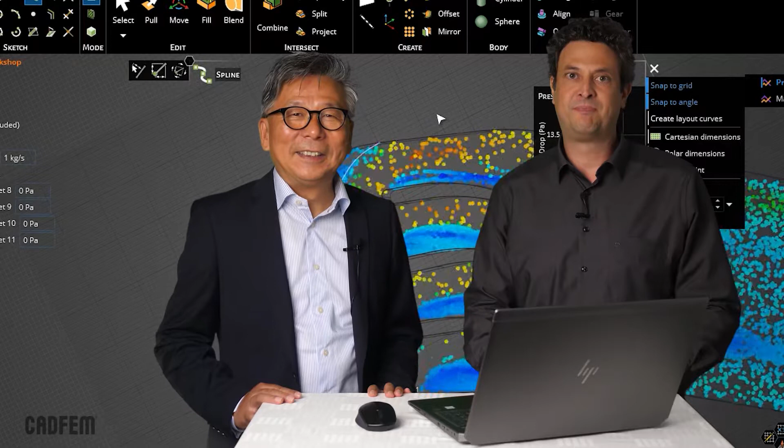What does an engineer need if he wants to realize his great ideas in a product? Of course he needs a tool with which he can change his geometry very quickly. If he has a lot of ideas, he would of course also like to be able to evaluate very quickly whether they are good or not. Then, when the best idea has won, he would certainly like to validate how accurate the result is. So, the three important terms are easy modeling, quick evaluation and accurate validation. We will also see this in the next examples.

Here we see a great product developed by a good engineer. Now he would like to know what the stress distribution under inner pressure looks like, and instead of waiting many hours, he can use the new technology to analyze the stress distribution immediately. So now the engineer sees that the notch stress is not correct, because there is no rounding at all, so he needs a tool with which he can change the geometry very quickly. With this tool he can immediately insert a new radius in the geometry.

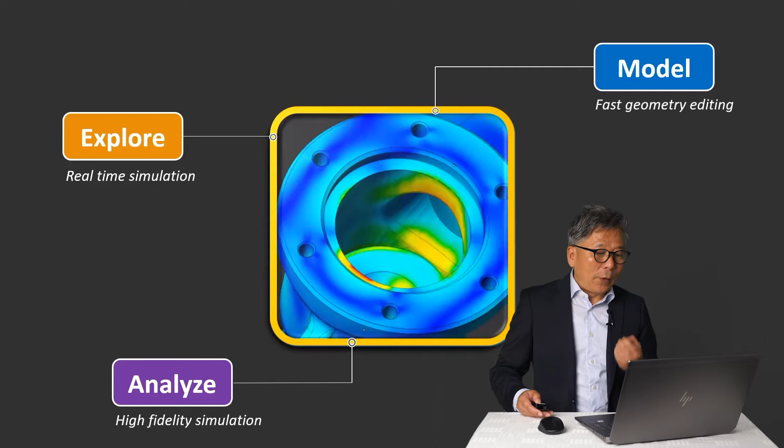And at the same time he can immediately simulate the stress distribution again thanks to the new simulation possibilities. So, he can test and validate different variants. Then he decides on a very specific good variant, and now he wants to know exactly how accurate the result is. In other words, at that moment he needs a tool that allows him to simulate and validate the result with very good accuracy. For this purpose, the Ansys Mechanical solver is used here, and a simulation is performed with it.

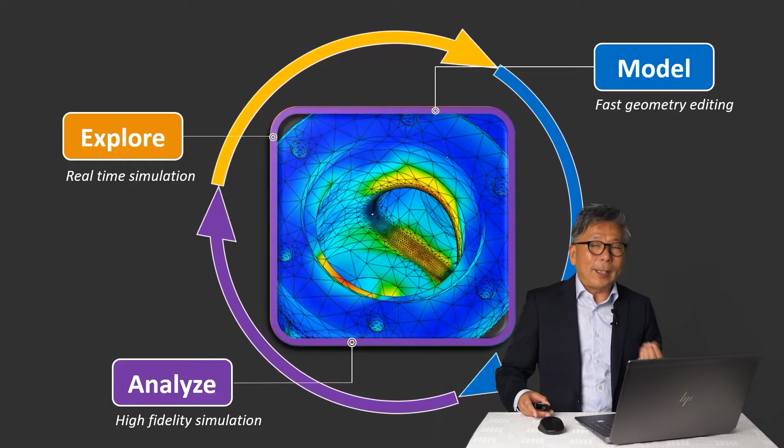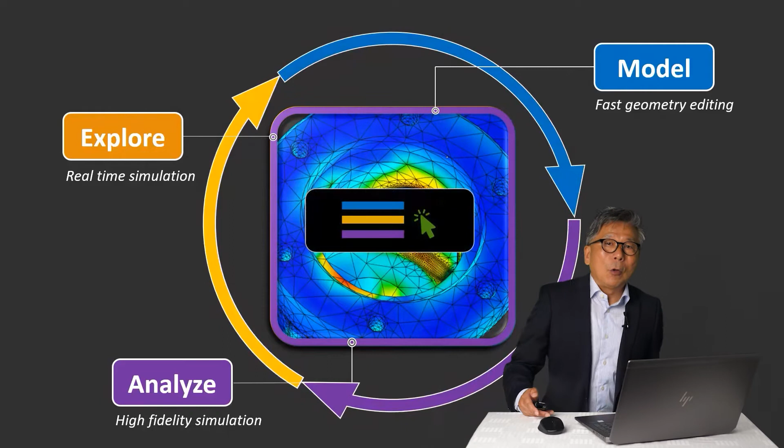In the early phase of development he will not yet know exactly when he wants to model geometry, when he wants to validate and when he simply wants to evaluate the idea. This is a dynamic process. Therefore, he can decide at any time what he wants to do, because it is not the software that decides, but the smart engineer. The engineer can say when he wants to model, validate or evaluate. The software does exactly what the engineer needs.

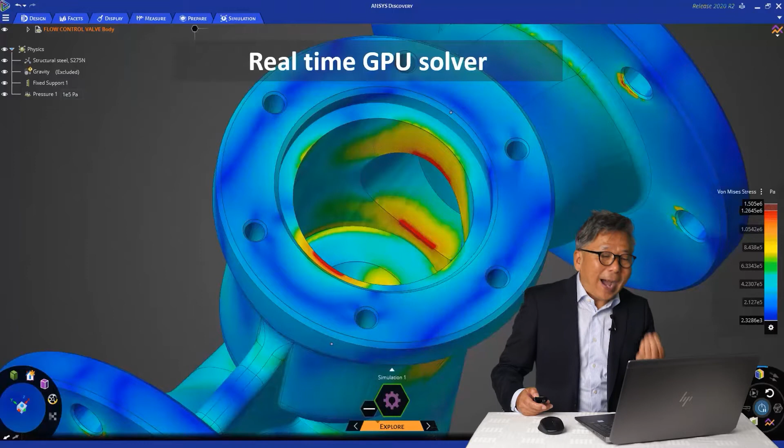In the geometry state the engineer can say, okay, now I'm satisfied, now I want to see the stress distribution under inner pressure. And now he can see the stress distribution. Thanks to GPU technology, he gets a result within a few seconds. And because the result is available so quickly, it is possible to test different variants very quickly.

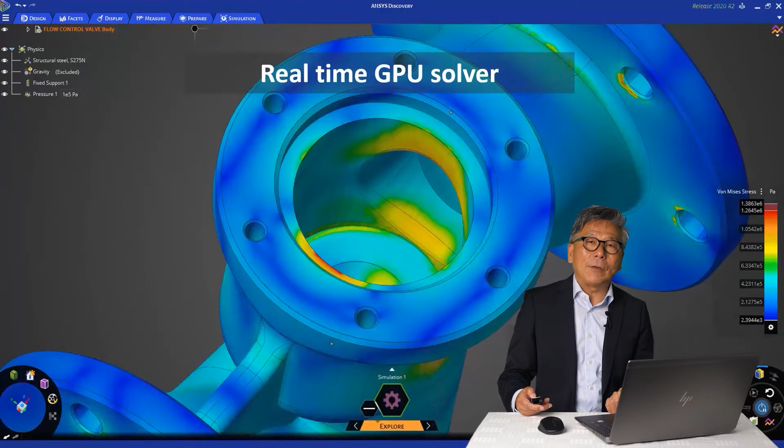For example, the notch stress - there you simply insert a radius. In the moment in which this radius is inserted, the result is already there. So, the engineer can quickly test different variants. Then he decides on a good variant, and now he wants to know exactly the stress in this region. For this purpose, a calculation is performed in the background with the Ansys Mechanical solver.

Now you might think that the software can do all this very well, but it is very difficult to operate. No, it does not have to be. With this new software technology, a very complicated task can still be solved very easily.

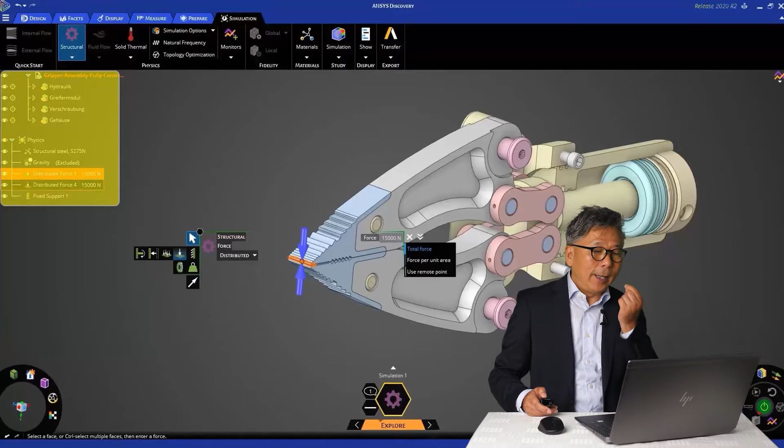This is the entire user interface of Ansys Discovery. Above you see a modern menu for those who are used to such a menu - you can work with it. For those who work in a very structured way, a tree is available on the left side. But very special and new is the heads-up display. This knows what the user wants to do.

That is why it communicates with the user. Here, for example, we have a structural mechanical task. When you click on a surface, the software asks what load you want to apply. The engineer says, a force. And the software asks, on a point or on a surface. This is how software-human communication starts.

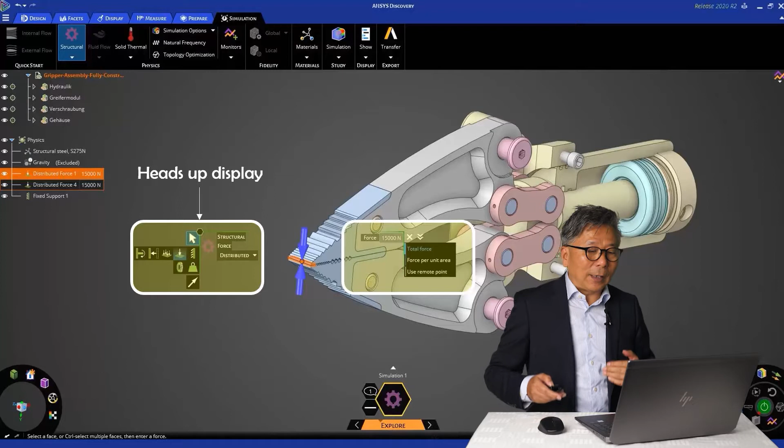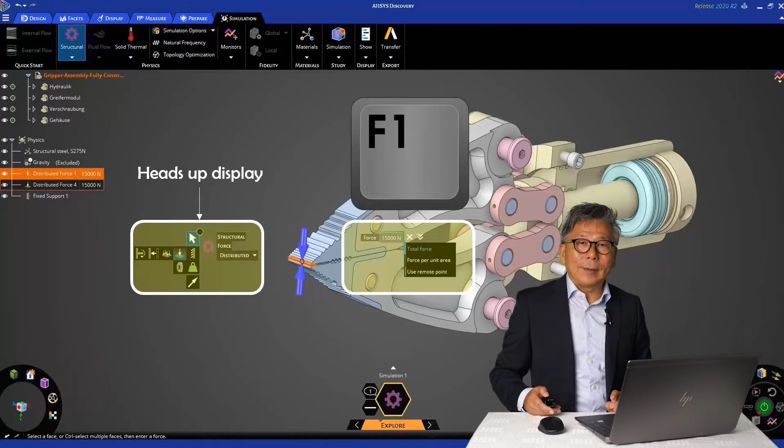At some point it may happen that you don't know what the next step is. But that is not a problem. Just press F1. At this moment the software shows you what is possible in this state. So don't worry, whenever you don't know what to do, you simply press F1.

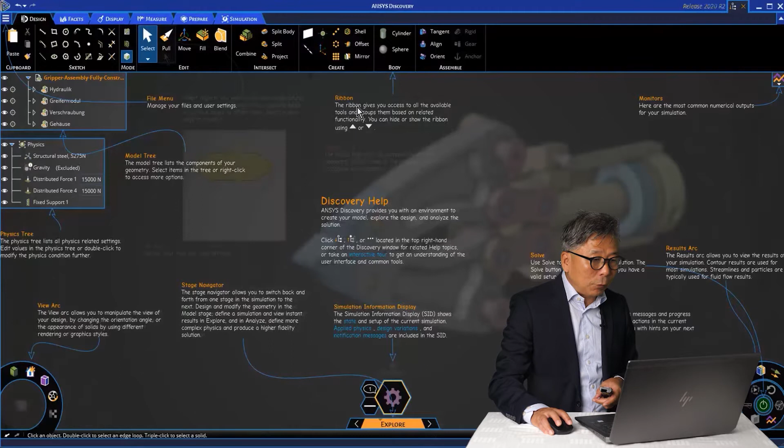This is more than just a help function. You get a complete overview of how the software works. For example, I would like to know this pull function. What the help shows is not only an explanation but also an animation of how this function works. If I want to make several drillings, I click on it and the software shows me how it works. This is a very modern and dynamic help system.

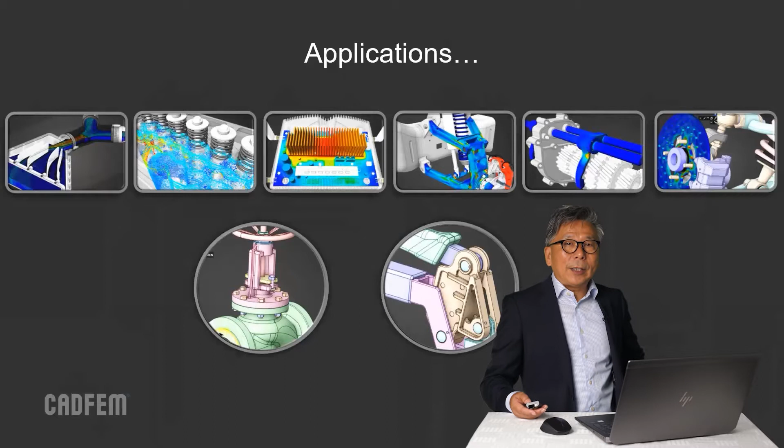We have tested very many applications with different physics, and in this presentation I would like to show you two examples. The first example is a fluid example. Here we see the geometry state. To simulate a flow, I simply extend the pipe. In this configuration I can do a fluid simulation in seconds. So I can examine different variants.

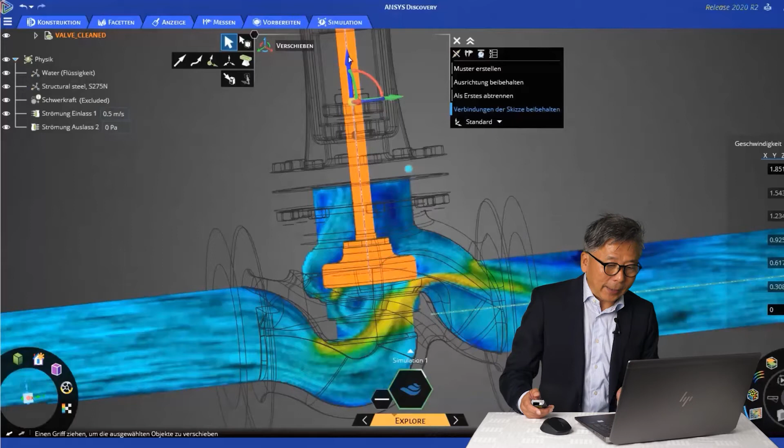Now I say, this is a good variant. I want to know the exact velocity distribution. For this I go into Analyze and create a very fine mesh. And then I can perform a very accurate fluid simulation with the Ansys Fluent Solver. Not only that, that's not the end of the story.

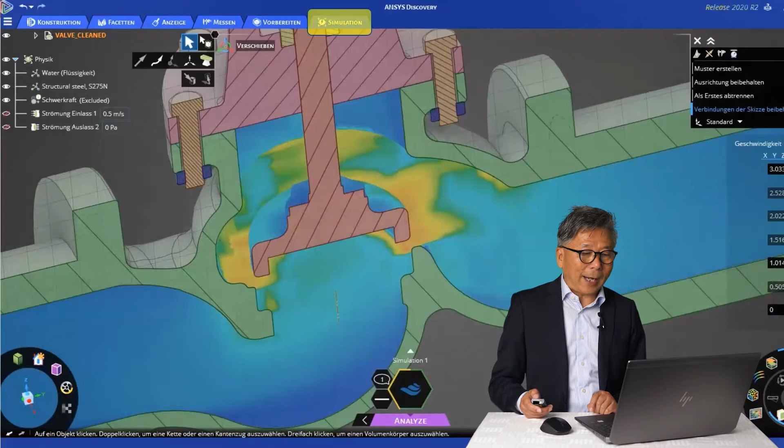The user can even go so far as to hand over the whole thing to an expert. There is an option to pass everything onto Ansys Fluent. Just click, and the model is exported to Fluent.

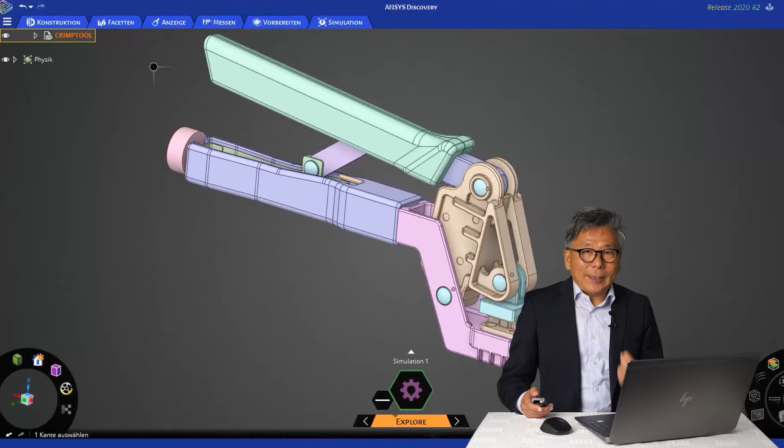The second example. Let me show you a structural mechanics example. This is the geometry, and we already know that it is very easy to modify. The simulation of different variants is very fast, so the engineer can quickly evaluate different variants.

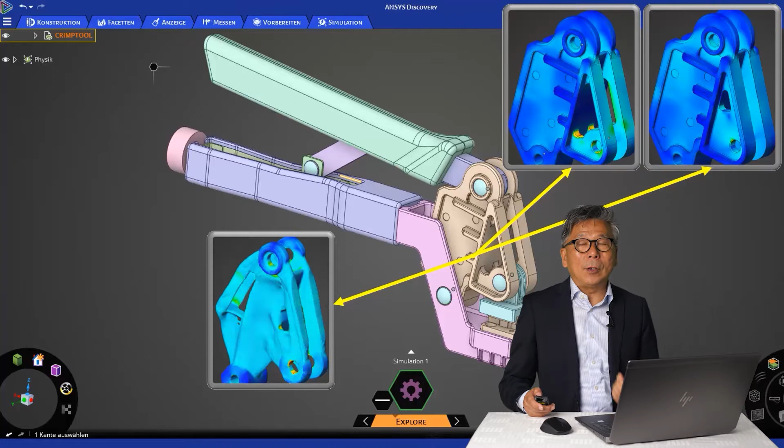Another possibility that the software offers is topology optimization. I can tell the software that I want to have a geometry optimized under a certain load. Now I get a geometry from the topology optimization. What's great is that I can convert the suggestion into a CAD model at the push of a button.

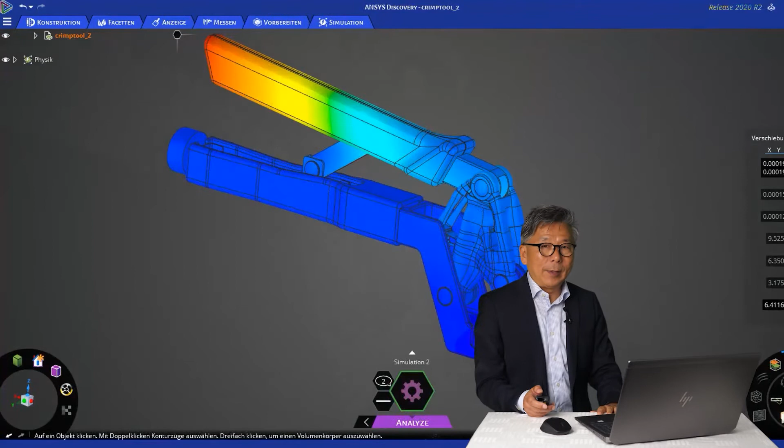Now I can replace the old geometry with this newly created geometry and perform a nonlinear contact simulation for the entire model in Ansys Discovery. Of course, I get a nonlinearly calculated result and a good local stress distribution.

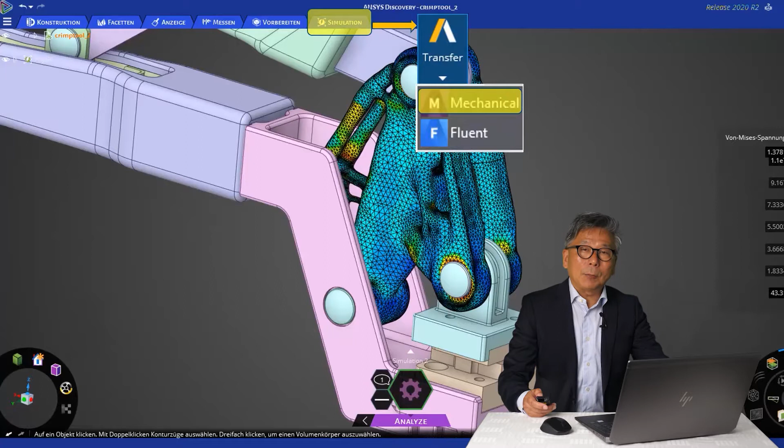Now comes the next question. So far everything is great, but I want to continue in Ansys Mechanical and do some other calculations. Is that possible? Yes, you can simply export the model to Ansys Mechanical here. What happens? You are now in Ansys Mechanical.

With an import like this, you always wonder what has really been imported. So here, from Discovery to Ansys Mechanical, the following has been imported: geometry, material, mesh, contacts, boundary conditions, and loads. The entire calculated model has been imported. Now you can continue with these imported things in Ansys Mechanical and calculate more things.

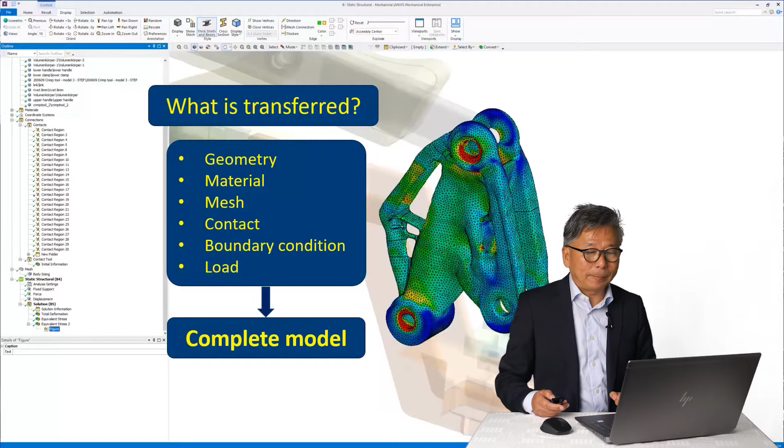Currently there are 4 physics in this release: structural mechanics, which includes linear and nonlinear statics and modal analysis; fluid analysis; thermal analysis; and thermal-mechanical coupled analysis.

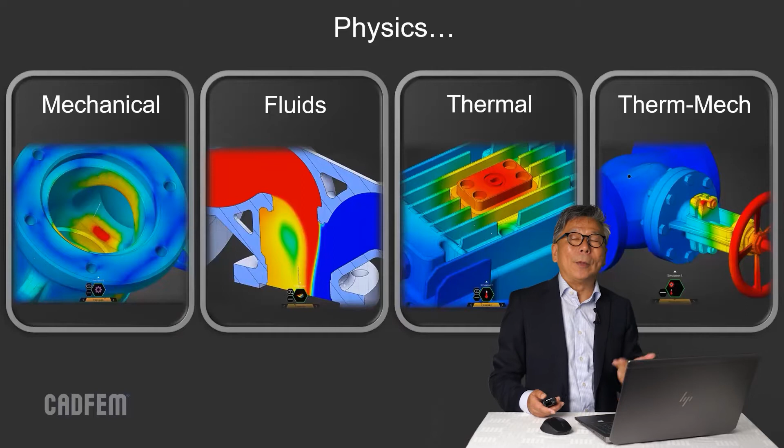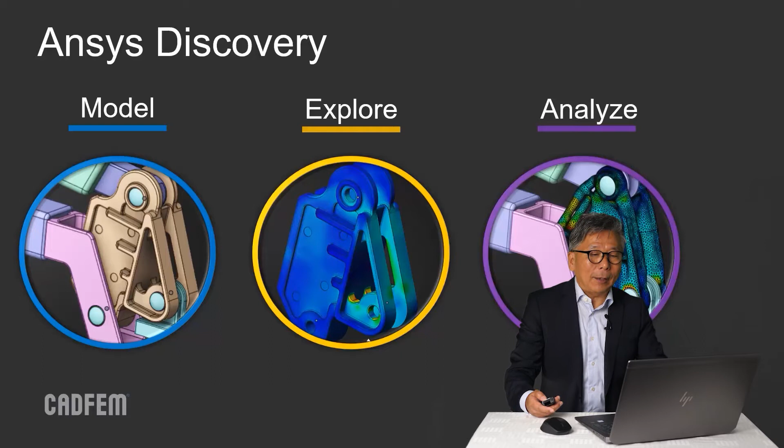Let me summarize. With Ansys Discovery we model, we simulate very quickly, and we validate very accurately. We don't have to decide on many software environments, we have everything in one environment. You will have a lot of fun with that. Thank you. And I would like to show you this joy with Model, Explore, Analyze.

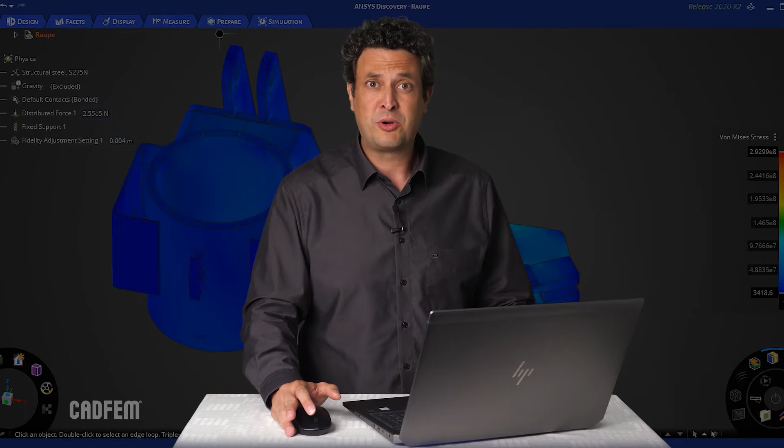Let's have a look at it in a demo. Within Discovery, I have chosen an example from the Engineering Office Brandt. The Engineering Office Brandt, Michael Brandt, has published a book, Understand Physics, Construct Better.

And there are many construction principles in it, and it always follows the thought that if I understand physics, or let myself be guided by physics, then I can also make better constructions. And this is exactly what the Explore function within Model, Explore, Analyze in Discovery makes possible. Hence this example.

And it is all about optimal stress distribution and bending, in other words, to optimally design the cross-sections. Let's have a look at this.

Within this assembly, we are not talking about the entire assembly. Instead, I will select the area that I want to simulate. I don't need the hydraulic cylinder either. Instead, I want to apply a force there.

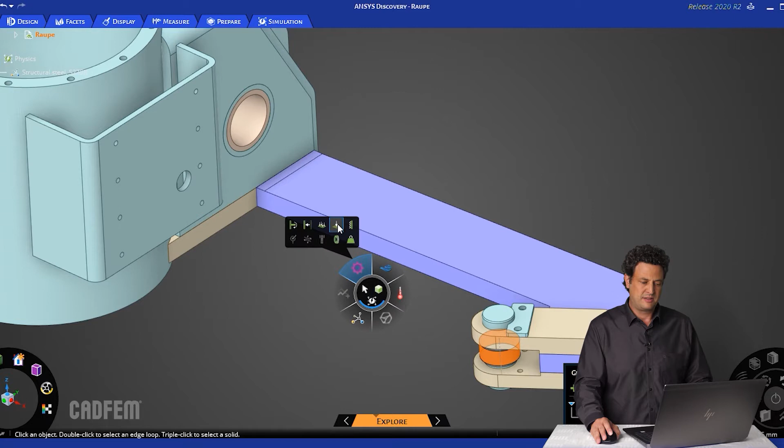I apply 255 kN. The direction is okay, after I have turned it around once. And then I still must fix it. So I take these support points here: 1, 2, 3 and 4, and apply a fixed support there.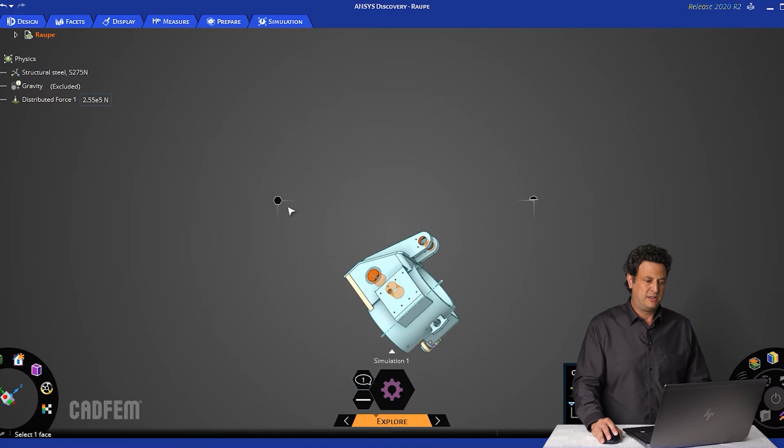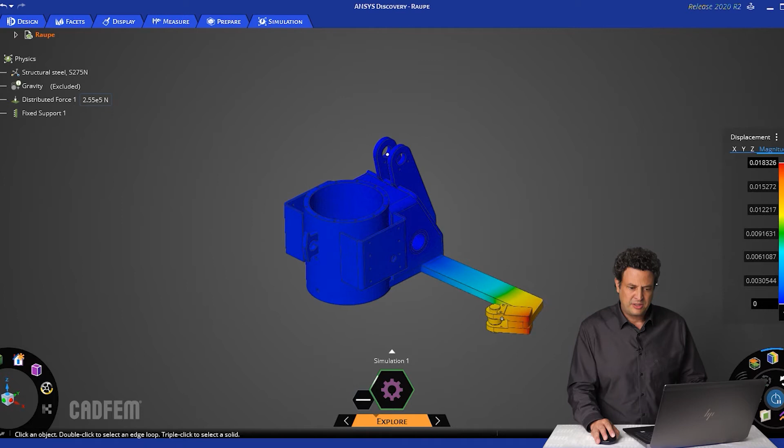Now I immediately start the analysis and look at the first result. I am interested in the deformations and in the stresses. First, the deformations for reasons of plausibility. The animation looks good. And second, the von Mises stress. And then you can already see that it is about this connector here. I must optimize it, and the first thing I could do is create a larger cross-section.

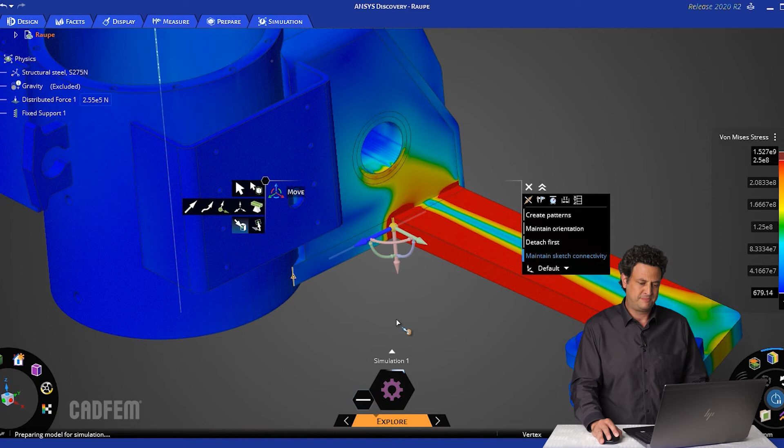I set the yield strength in the legend to 250 megapascals. And then I can take the edge here at the front and widen it properly so that we have more cross-section available for bending. Explore gives me immediate feedback. Okay, here I am already successful.

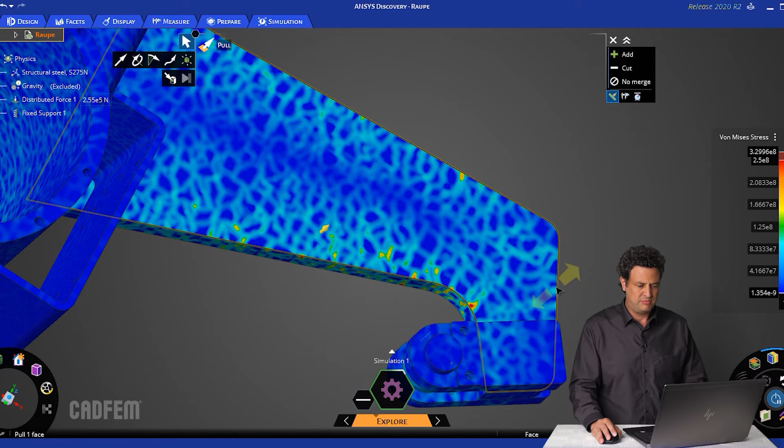I could follow the same thought back here. How do I provide more material here? For example, by entering a blend radius. And the result is quite satisfying, better than before. But there is more to it. I take this radius here and orient it concentrically with the cylinders here. This of course results in more material, and a larger cross-section. And what effect does it have on the stress?

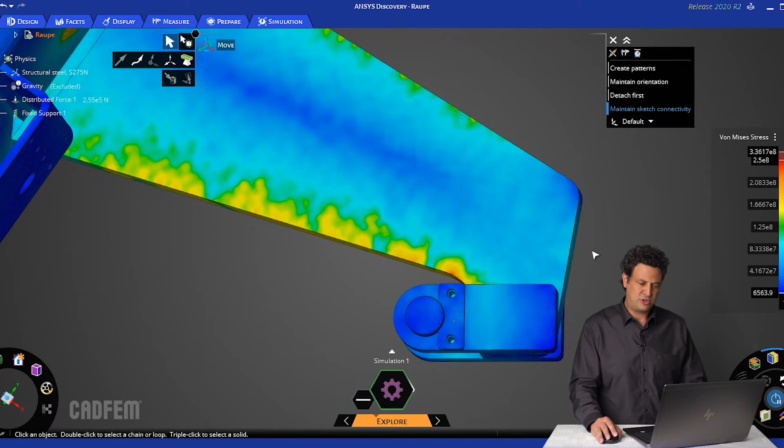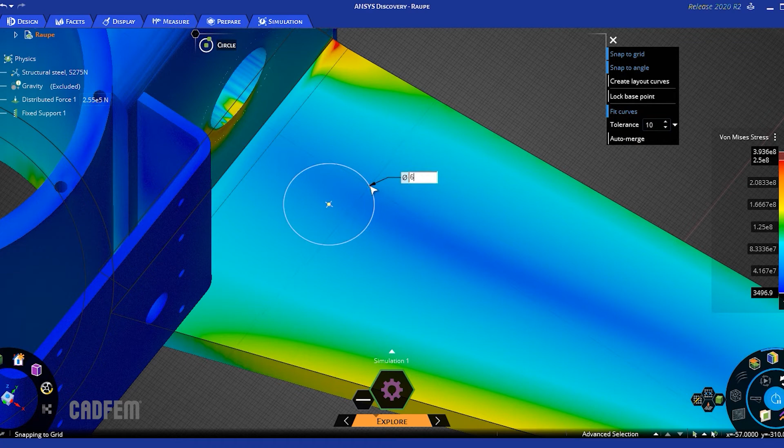Wonderful. So, 250 megapascals, we are probably very close to that here. Looks good. Here I have a neutral fiber, as you can see. And I could save a bit of material there now. Now I'll make a circle here, 60 mm, and the second smaller one 40 mm. And from that I can now create slotted holes.

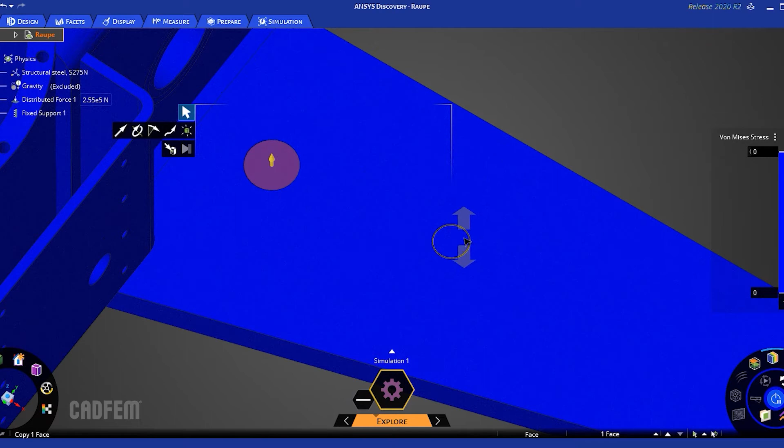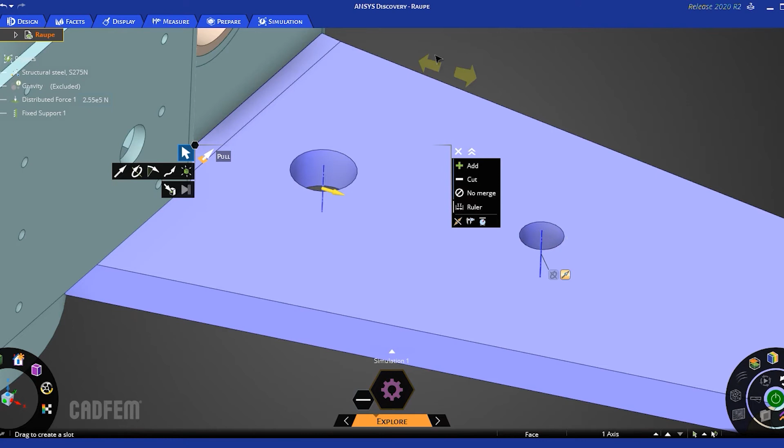I might switch off the solver for a moment so that it doesn't always calculate. And then we'll take this slotted hole here, or this hole. We take the axis. I want to draw it in this direction to a slotted hole, and then I make it 80 mm long. I do the same here in front. I take the axis, say that I would like to pull it in this direction, and make the whole thing 80 mm long again.

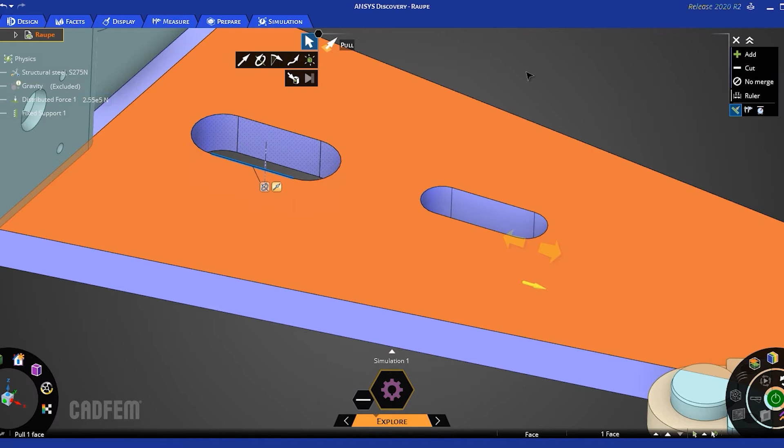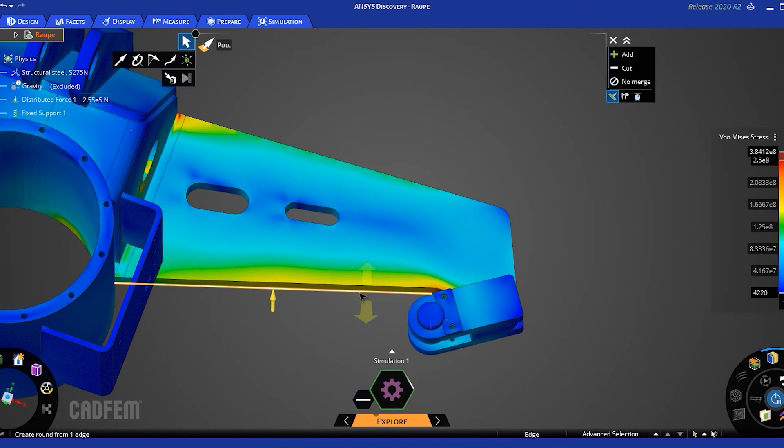Good. Now I have saved material in the neutral fiber. Let's see how that works out. And we will look at the result again, at the point of interest. And it looks similar to the one before, so this has not changed so significantly. So that was a good change that we made, and of course it saved us material.

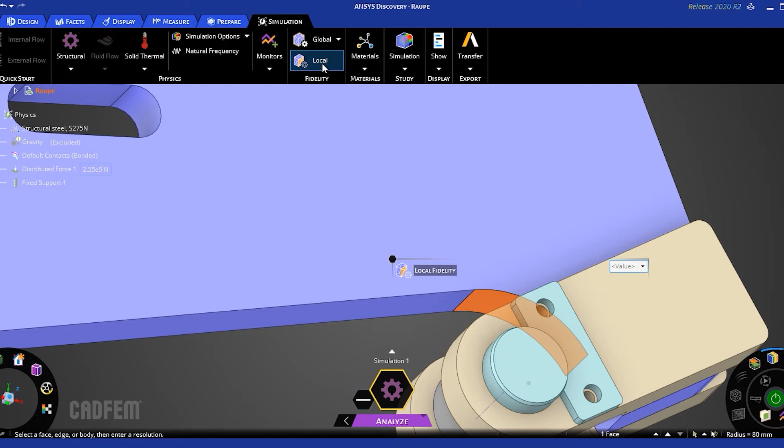Now I want to have an exact result, so I will go to Analyze. I want to be able to refine this locally, for example to determine the exact stresses. So let's look at this location. And at this point I want to do a local mesh control in the simulation, with an element size of 4 mm. That's all I have to do.

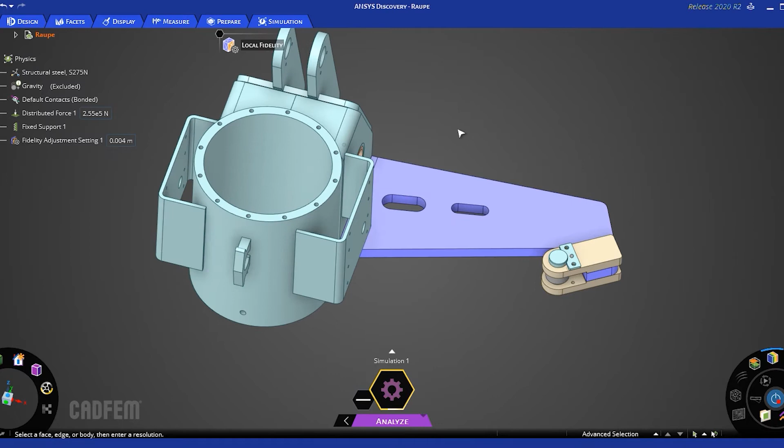With this setting I can run the whole thing now, and of course it takes a little bit of time. He must mesh and calculate. I have already prepared this. I'll open the model. And as I said, it is now meshed and calculated. Now let's look at the part of interest.

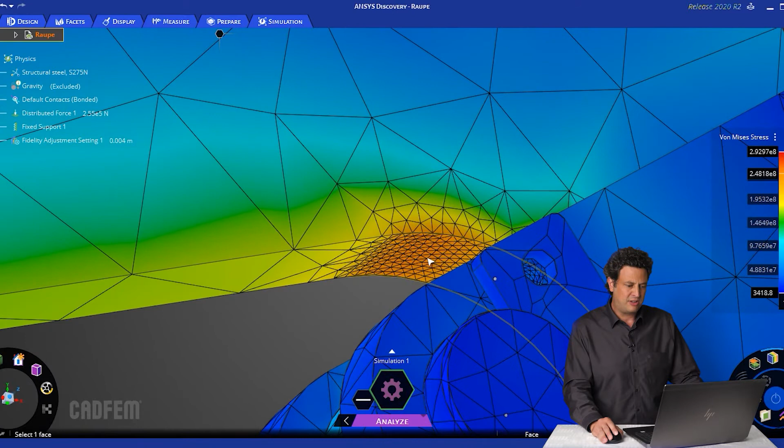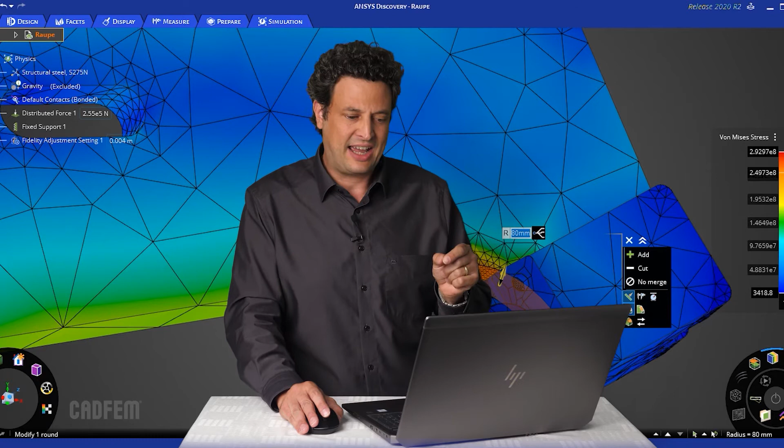And if you take a closer look now, there is a small numerical value in the legend. This is the location where I just moved the mouse over. So we have reached 250 megapascals here. Now the question is, how could I provide more material now? And a simple answer is, I put a larger radius in. Do I have to go back to the model for that? No, I simply change the radius here inside Analyze to 110.

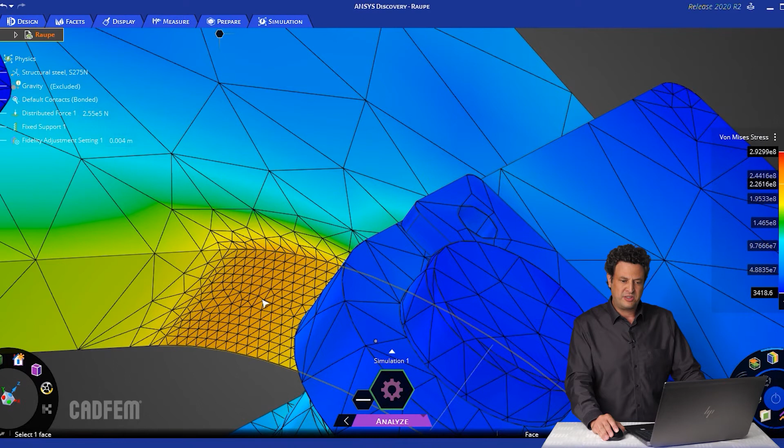It takes over the geometry change. I start it all over again, and now run the analysis again with the change. That takes a little time now. And I now look at the finished result. And if you follow the probe again, we now see that we have reached 230 megapascals.

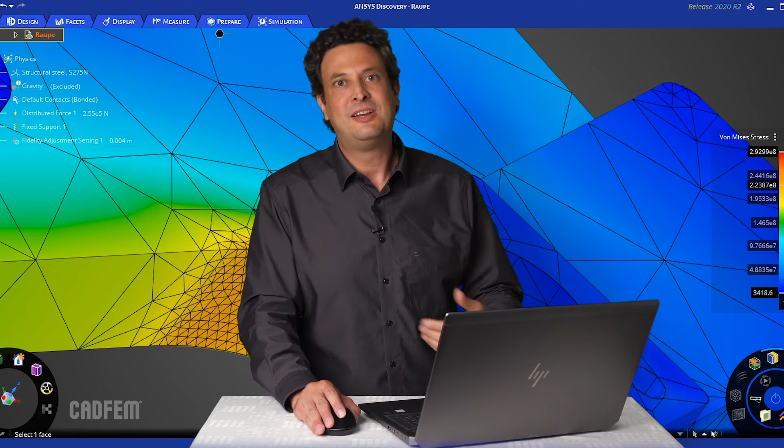So, model, explore, analyze: editing the complete process through geometry. Try it out, and then at the end do a really accurate analysis, refine a local stress. And then there is even the clue that model is not separated. Model is available for us within Analyze, so that I can give my ideas free rein at any time.

So much for the first example. I would also like to show you a fluid example, and here I took one from our seminar on the new discovery. It is about a distributor. The water flows through it from one side, and has 4 outlets, and the flow should be as even as possible. In this context, we are now looking at model, explore, analyze, of course.

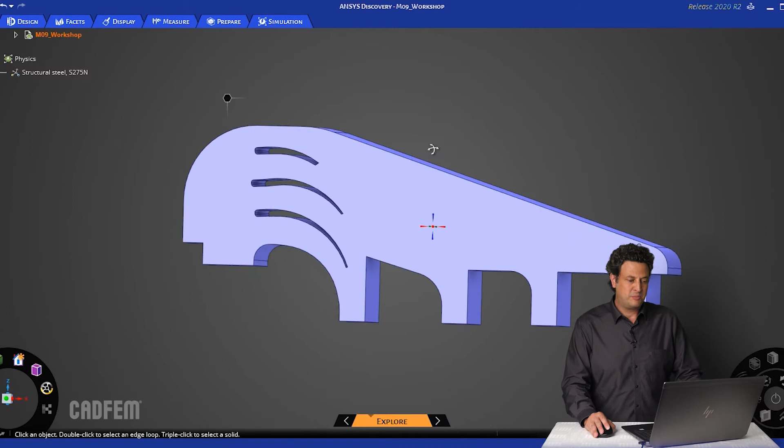So I will set this up. We have these 4 outlets here, and we have the inlet here. And I start with an inlet with a mass flow of 1 kilogram per second. The whole thing is water, in the default setting. And here on these 4 surfaces I now apply 1 outlet each.

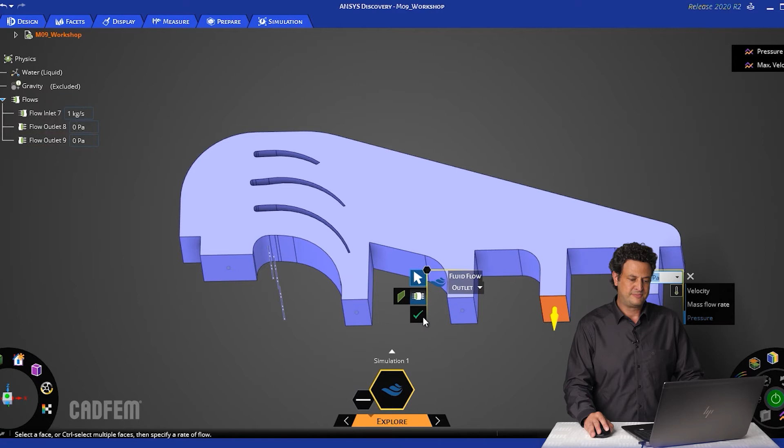And then I calculate and explore. I immediately get an impression of what is happening in there, and you can already see that the solver converges here. But I can already make first investigations. Where do I have high speeds?

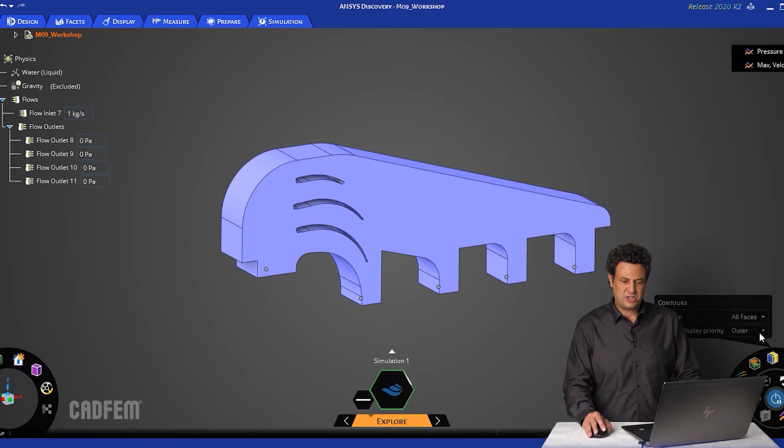I can see that very well with streamlines. Or a representation that I personally appreciate very much: the highest values at each screen point. This way I can always look into the structure, and you can see very nicely that I have a range of high speeds up here.

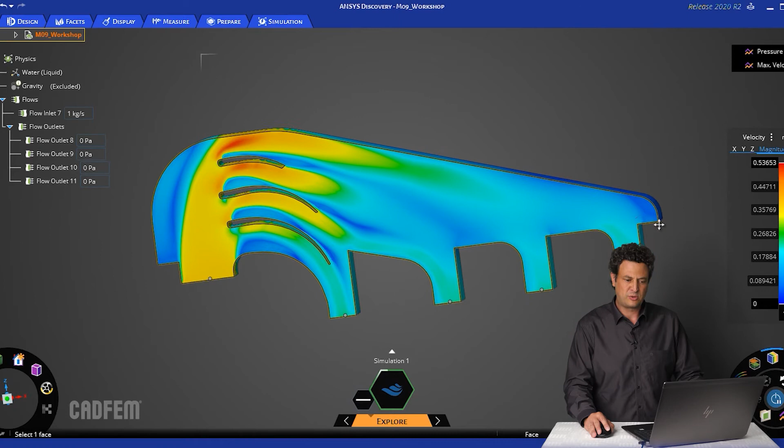What you can also see is that I obviously have a dead zone here, and there in front it is also very dark blue - there is also a dead zone. Maybe I want to optimize that. We'll see it in detail in the dead zone.

For example, I could display the vectors. I can't see too much now. Maybe better the display with the particles. And that looks great - here I see how the fluid recirculates here.

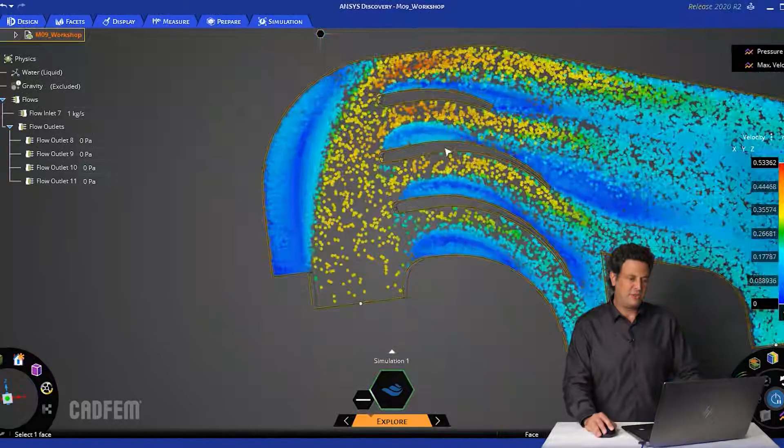In the end I am interested in a result variable, namely the pressure loss. This is entered into this diagram when the stationary solver is converged. And we currently have a pressure loss of 12 Pascal.

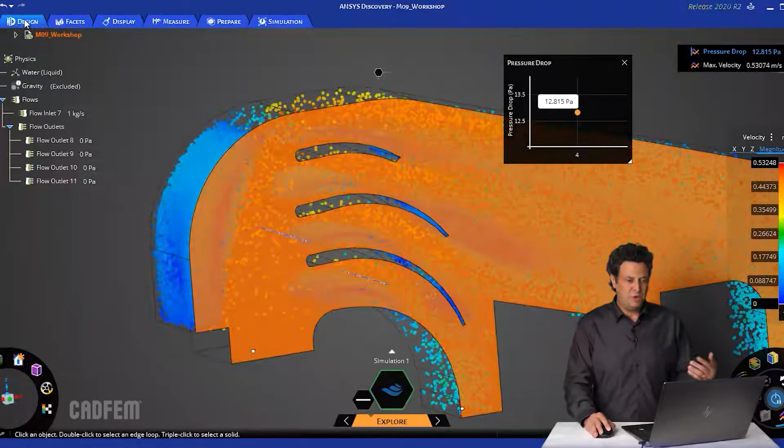And now I want to draw on this result, so I want to be guided by physics and make a better model. I will build a spline here, which follows this dead zone, and just cut off this area of the geometry.

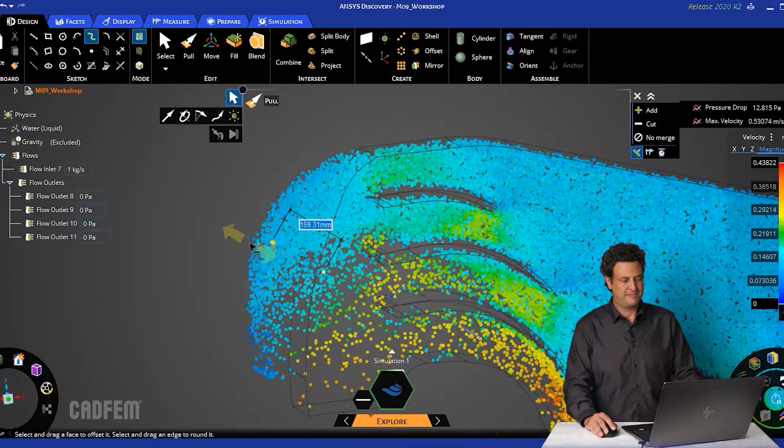Then it looks much better, and I avoided the dead zone. If we now take a look at the velocities - well, we had a speed of 0.53, now we have a little bit more. It rises to 0.55, and that's this range up here.

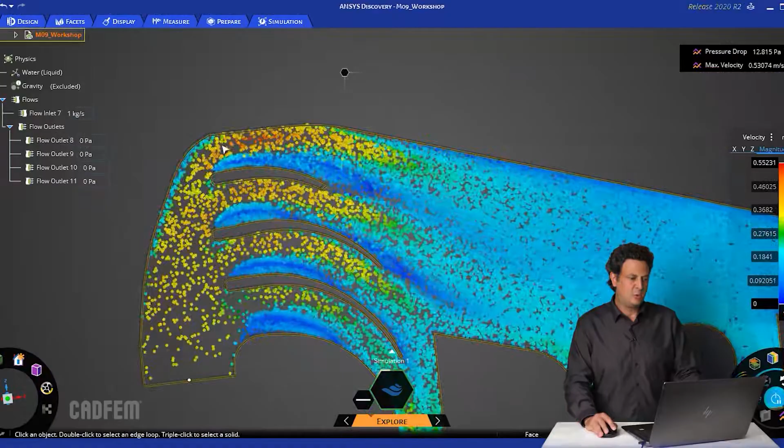So now we might consider if we give it a little more space. I just pull the cross-section a little bit apart now, maybe even to the left. Let's take this area and pull it out a little bit, in such a way that we get a slightly wider cross-section there. And now let's take a look at the speed distribution.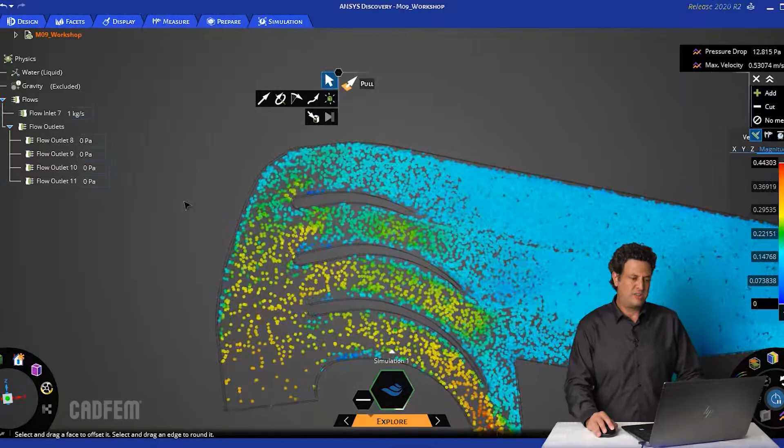Or rather, what pressure loss will occur at the end. We can now have a look at the whole thing in the diagram. You can see very well that this region of high speed has indeed changed significantly. And the pressure loss, I'll switch it on right away, and then we hope that the result will be shown to us here.

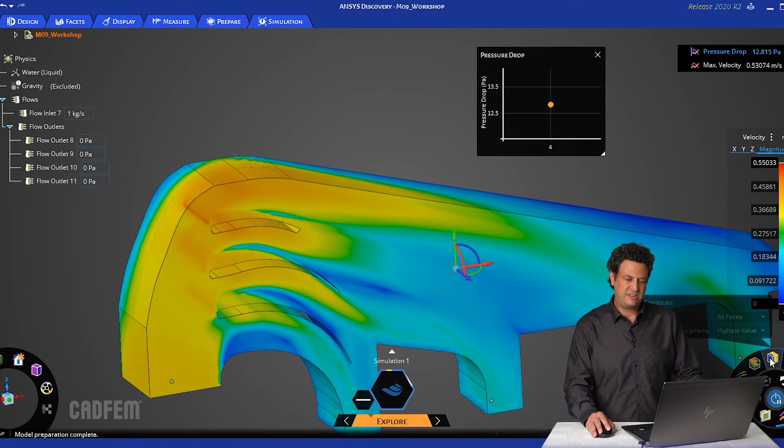In the meantime, we could perhaps look at another result variable - for example, these projected streamlines, that is also very instructive. Here you can see this flow behind this disturbing body.

And now also the solver is converged. And apparently we have found a trend with which we could actually significantly reduce the pressure loss.

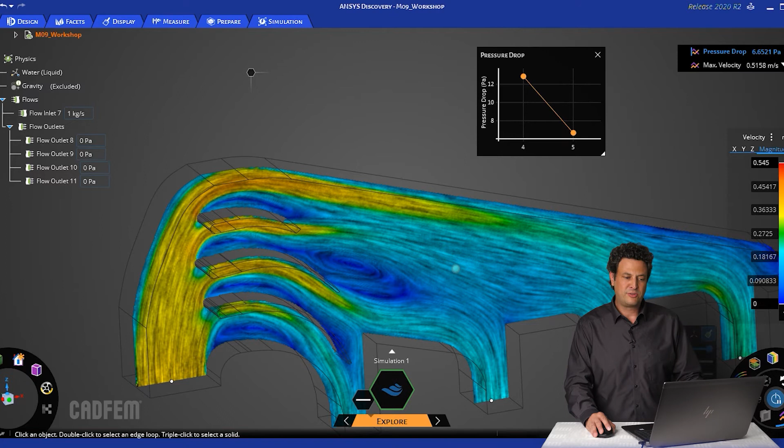That is good, but now I want to have an exact result. So I want to determine the pressure loss exactly. That's why I go to Analyze and run this analysis with Analyze Now.

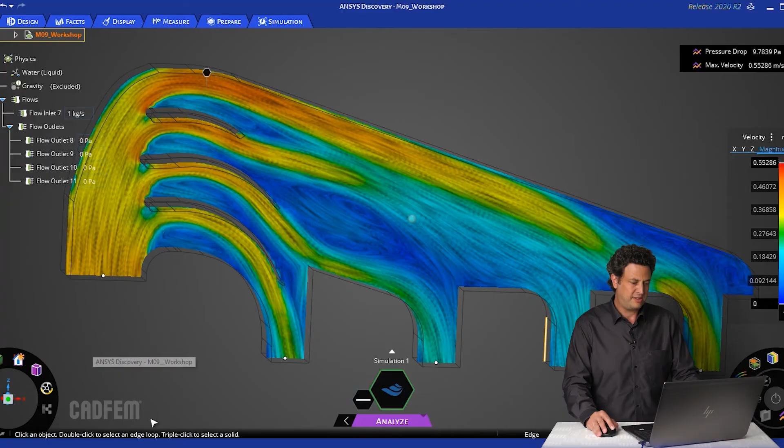Of course that takes a little time - it must mesh, it must calculate. I have prepared it before. That is the result, and let's take a quick look at the mesh. Such a beautiful mesh that we get, and you can also see very nicely these prism layers that it has built up automatically.

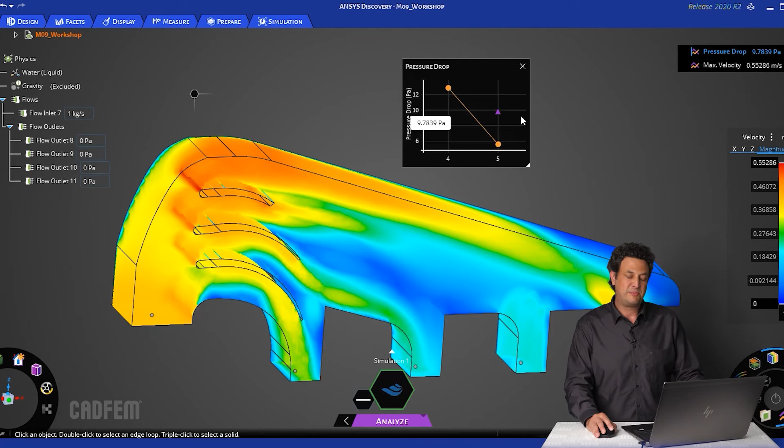And if we now go back to the results again and look at the pressure drop, then we see here in orange the trend that we found with Explore. And then we see here in purple, which is the color of Analyze, also the corresponding result for this design, provided that we calculated it with the exact Fluent solver and with this very good mesh.

Simulation used to be my daily business. Now it's more my job to assess whether and how tools fit into our process and how they help us in achieving our company goals. I want to show you which role the new Discovery plays for us in that regard.

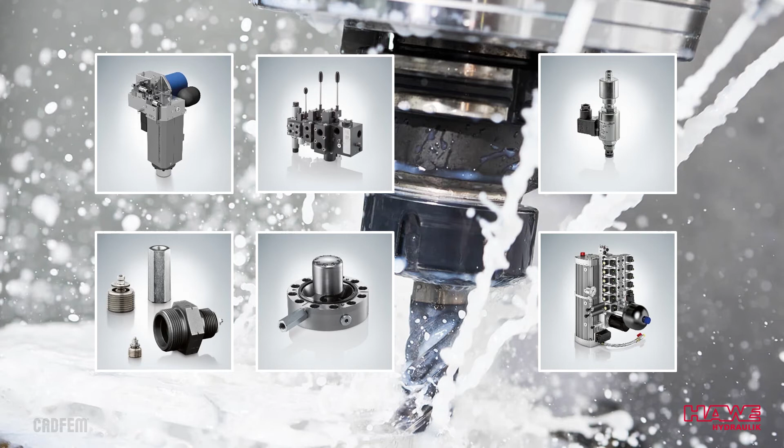HAWE Hydraulik is a middle-sized company in Germany and one of the leading manufacturers of hydraulic components and systems, with 2,500 employees worldwide. Due to the consistent use of steel, the hydraulic components can be designed for high pressures and very compact builds. Due to the very high production know-how on state-of-the-art machines, we can produce our valves nearly leakage-free, and it allows us also to adapt them to our customers' requirements.

Simulation plays an essential role in this process. It clearly contributes to shortening the time for development. It allows us the creation of new ideas and development approaches.

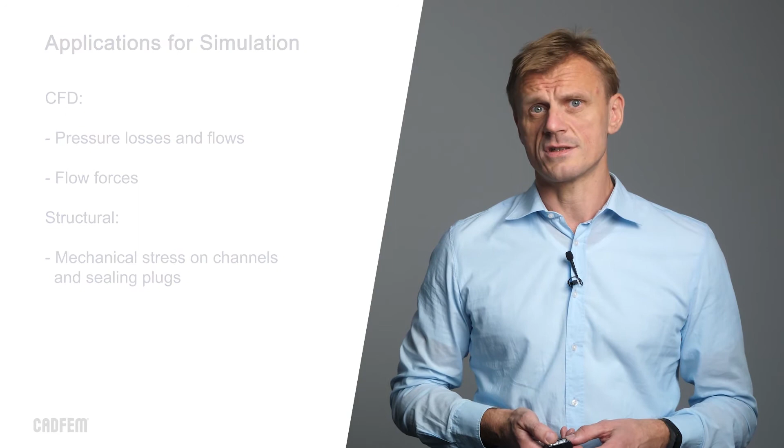A development process depends on many factors, for example the delivery time, capacities, test benches, and so on. A traditional development loop in hydraulics with physical prototypes can take several months. Our C-level is therefore interested in shortening the development cycle. For the qualification of prototypes, test bench capacity and manpower is necessary, which means high costs.

In order to reduce costs and generate synergy effects, we have taken certain steps over the last years. First, the simulation and testing departments have been merged into the Simulation and Testing Center division. Second, we have successfully established simulation in the development process.

A development loop with virtual prototypes can now be realized in a few weeks. Now we see the requests from our design department for simulations are increasing, which is good. But this leads to bottlenecks in the simulation department, meaning additional waiting times of some weeks. How can we resolve that in the next step?

We can either increase headcount in the simulation department, or we deploy suitable simulation tools to the designers and design engineers. At HAWE, we decided on the second variant with Ansys Discovery, because it is more sustainable.

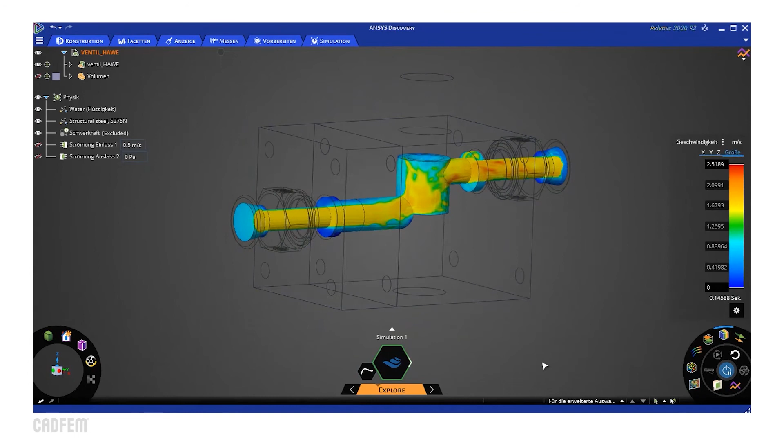Already last year, we were looking for a tool that would help our design engineers solve standard tasks in the CFD area on their own. After extensive evaluation, at the beginning of 2020, the Discovery product family emerged as the winner.

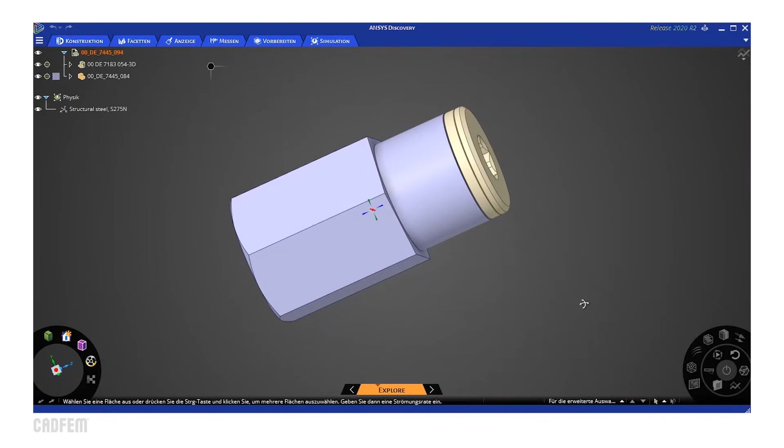The decisive factors were the ease of use and speed of Discovery Live, and also the speed and reliability of the implemented high-fidelity solvers. A positive side effect?

With this package, our designers can also do mechanical simulation with more functionality than the current CAD tool is offering. With the new Discovery, our designers now have all of that in one modern user interface: CFD and mechanics to test ideas themselves. And it's extremely clever that I can change the geometry right away.

Discovery already has more functionality than typical CAD-integrated tools, and it is still extremely easy to use. The reliability and speed of the solvers in Refine is also important to us.

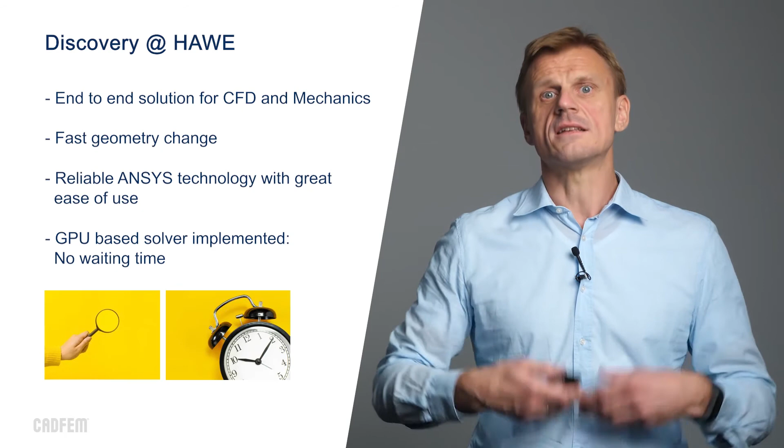Our experts can hand over the standard tasks with confidence. And last but not least, the Explore stage simply calculates incredibly fast. No more waiting time. I think that's pretty cool.

Obviously, Discovery will give us a better understanding of the physics in our products. This means for us better product performance, higher efficiency in development, and shorter development cycles.

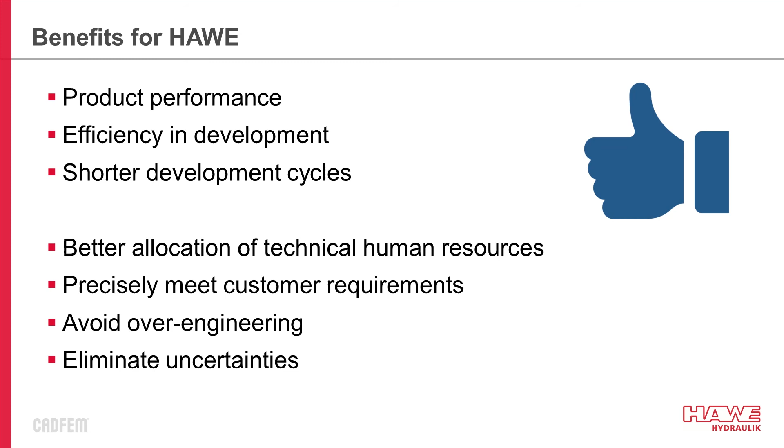But there is more. We can better allocate our technical human resources. We can meet customer requirements more precisely and avoid over-engineering. We eliminate uncertainties because the designer dives into the whole physics very early in the process.

During our evaluation, Discovery turned out to be an interesting addition to testing. With Discovery, every test engineer can simply conduct a plausibility check in parallel. Discovery helps the test engineers optimize the test methodology in advance.

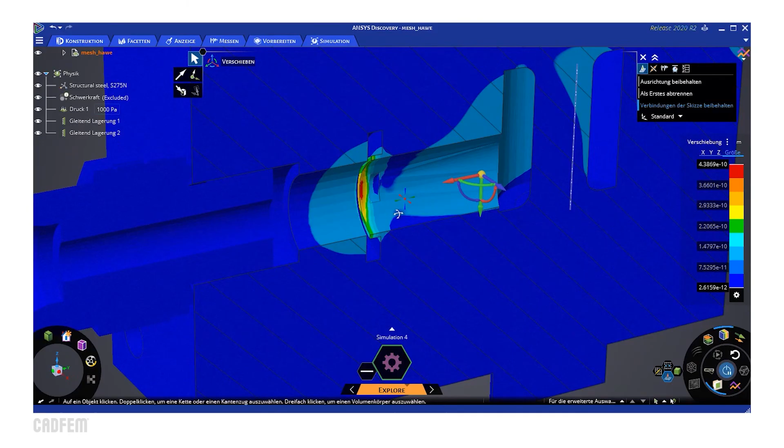Discovery allows simulation and testing to go hand in hand. If both point in the same direction, the certainty of being on the right track is greatly increased.

We are aware that the July release is the first commercial release, but we clearly see the potential that the concept of Discovery fits very well with our goals. Discovery will help us establish efficient variant analysis as a standard for our designers.

This is the new Discovery. And if you are just as enthusiastic about the Model, Explore, Refine in the new Discovery as we are here at CADFEM, then you now want to try it out for yourself.